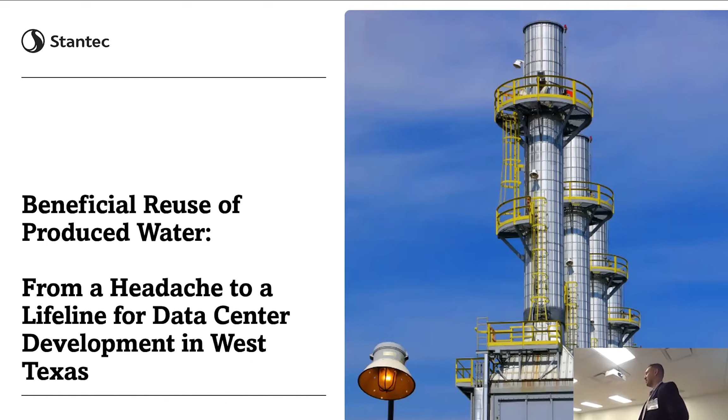I'm really excited to be talking to this group today because it brings together two industries: one that I've been very involved with over the past decade, the oil and gas industry, and a new industry entering the fold as a potential off-taker in data centers. Seeing these behemoth sectors come together and do development is really interesting, and trying to solve their problems, especially around water, is something I've been passionate about. Finally getting the opportunity to see potentially things happening.

So I work at Stantec. We always start with a safety moment, looking at risks and safety in the context of energy. If there's some energy source out there, there's probably some sort of risk. That's a good way to take an easy look at it—okay, there's something high up, there's potential energy, it can fall on me, something hot, that can cause bodily harm. I think this is a pretty interesting and useful tool, and wanted to share that with this group.

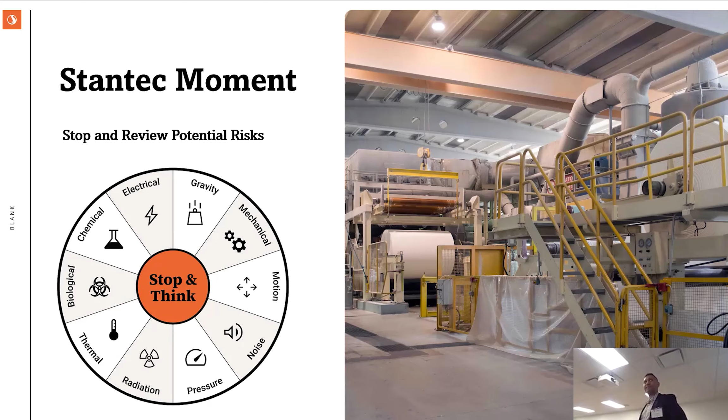In terms of the agenda, I think the last couple speakers really spoke a lot about the things I'm going to touch on briefly. They got into it in depth, which I'm really grateful for because I'm no cooling expert. But what I really want to talk to you about is the potential for really increasing our water supply. What we're talking about in a lot of these cases is where do we get it—groundwater, surface water, wastewater reuse. But really what we need to talk about is how do we get more water, and there aren't that many options. This is a case where water is a problem for one industry but could be a solution for another. I'm going to talk a bit about produced water—what it is, the challenges around it, what's typically done and what could be done. I'll also talk about data centers, not as in depth as Luis, just the water demands and some heuristics around water-heavy cooling portfolios—what you could look at for volumes, things like that. Some of the risks and barriers, and then conclude with some final thoughts. Hopefully I didn't put in too many slides, and we have some good Q&A afterwards.

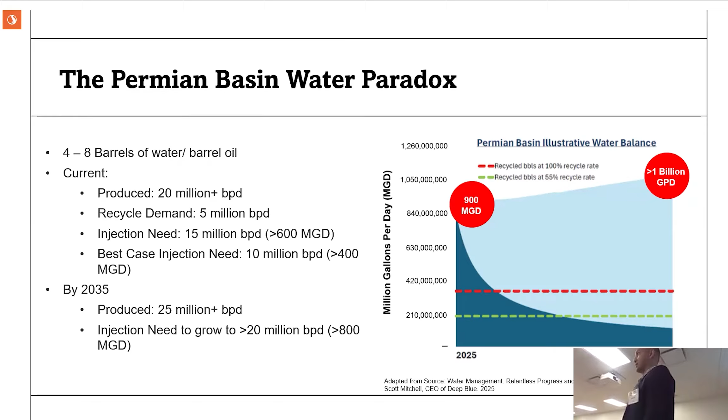For my oil and gas clients and people I talk to, they say they want to be producing the Permian for at least the next 30 years. So the water cut is just going to keep growing—this is just going to keep becoming a bigger problem. And of course, they're going to want more oil and gas out of that region. But the traditional way of water management is coming to a bit of a halt, simply because if you think of the subsurface as a big tank, that tank is running out of space.

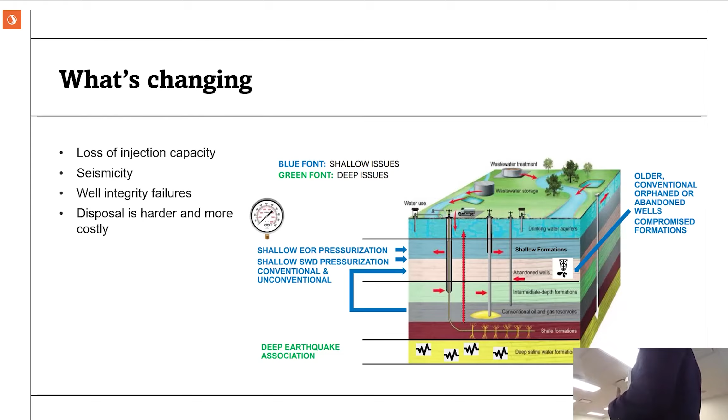We've seen this with deep well injection, which has been the traditional way of disposing of produced water, getting seismic events because of just the lack of pore space in the deep subsurface. They've transitioned over to shallow zones, and there's a lot of orphan wells that aren't plugged correctly, and we're seeing well blowouts because of the pressures within the shallow zone. So just in a nutshell, it's becoming harder. This is a problem that, what I've heard, between 2030 to 2032, we're going to be running into some serious problems. Just to make it clear, this is an existential problem for the oil industry in West Texas. Can't manage or produce water, you can't produce oil.

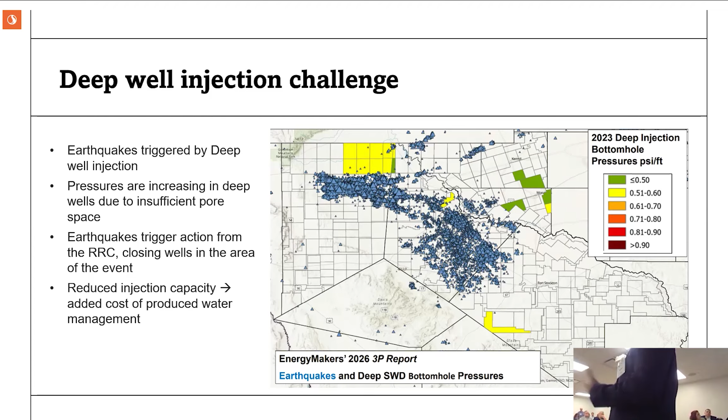So the deep well injection challenge, earthquakes are triggered. I've pulled some public information around the earthquakes, and you can see that in last year's presentation, I had two snapshots a decade apart from each other, but they're growing not only in frequency, but also in the scale of these earthquakes. Like I mentioned, it's just because of a lack of space. What happens is when an earthquake happens, the Railroad Commission creates a zone around which those wells need to be shut off for some amount of time until the pressures go down. That actually adds cost to the producers, because if you have less supply of injection capacity, your cost goes up.

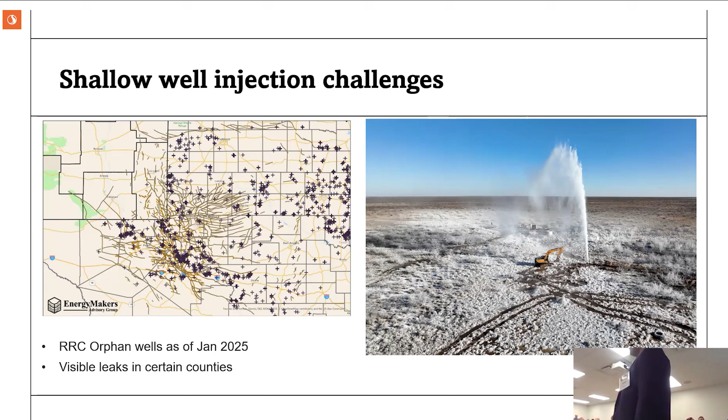So what are the options? What do you do? You can move the water away to some other places where injection has not been done, but this is very expensive. There's a new pipeline that's been announced that's going to cost nearly $450 million. And it's really not a long-term solution. It's kind of kicking the can down the road.

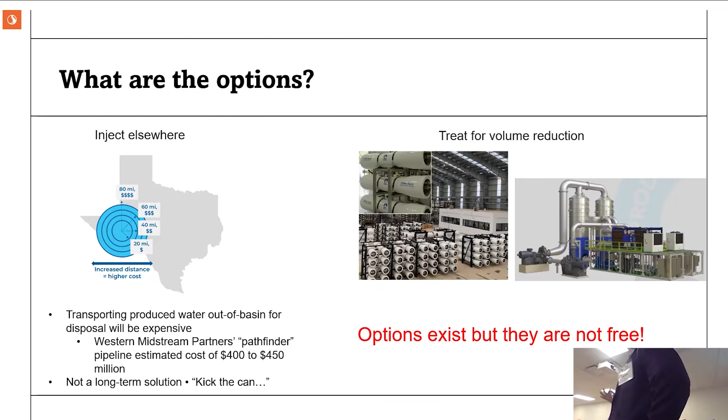These volumes are massive. You can also treat to reduce the volume, because you won't be able to eliminate it. You can reduce the volume, and that's been something that's been looked into, but it's been very costly. But as technology has advanced in this space, I think the costs are becoming somewhat reasonable. So there are options, but none of them are free. And really, that's what the oil industry needs to come to grips with. That's where we're at today.

In terms of produced water, there's no standard produced water spec. It's going to be different from the same well on a minute-by-minute basis, or even more regularly than that. It's going to differ between, say, a couple miles down the road - it will be very different.

In the worst case scenario, we've seen salinities up to 170,000 milligrams per liter of TDS, and that ranges all the way down to 100,000. So it's still very saline. The salinity of seawater is around 30,000, so that's 3 times that at the very minimum.

And it's complex. It's got all sorts of cats and dogs in it - oils, different scaling components, metals, radionuclides, you name it, it's in there. It's also got production chemicals, trace chemicals that are coming back from the production that was put in there to begin with. So all that to say, it's a very challenging water to treat, and being a chemical engineer, you can treat anything - it's about cost, right? So it's very costly.

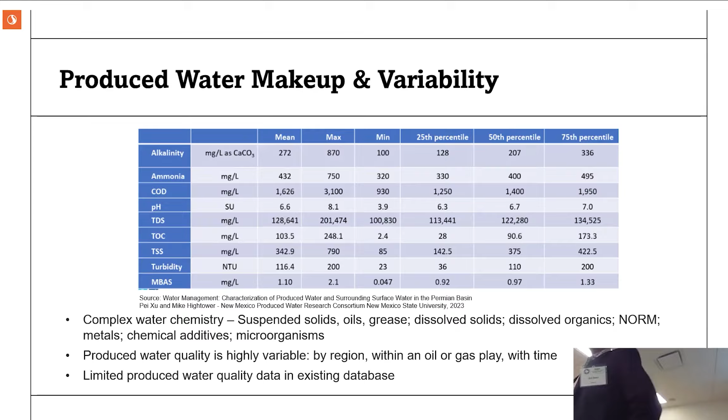I'm going to flip over now to the data center story. I think Luis covered a lot of this very well in his presentation, but really, what do data centers need in order to exist? They need a land mass, or a place to put the facility. They need power. They need fiber. They need a skilled workforce, and of course, they need water.

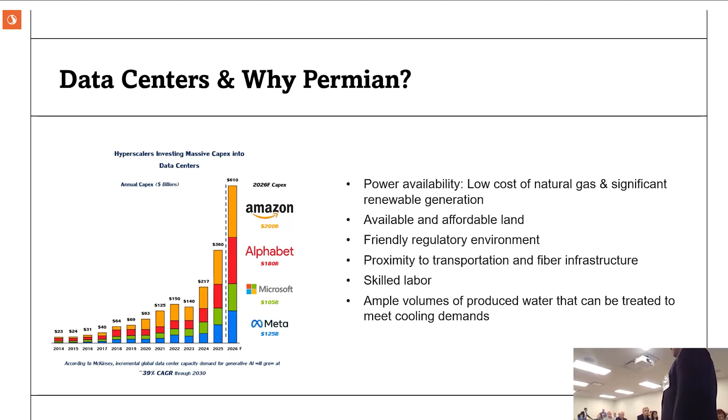The Permian Basin is unique in the sense that it's got lots of gas, and the ability to do behind-the-meter power is very appealing because of the queues to get into the grid. So it's got a lot of gas that you can use for behind-the-meter power. It's got a lot of land. There are major highways through there, so it's got fiber. It lacks water, in the sense of the sources that Luis listed, but it's got a lot of produced water. So trying to tie these two together is a really interesting thing.

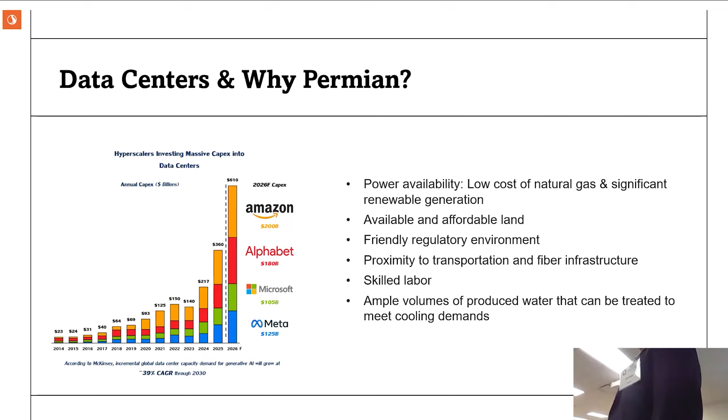I apologize, I noticed after I sent my last version to Gary that there was a little bit of an error here, so I'll just talk through this. High level, again, Luis covered it - you can have very heavy water-cooled systems, and you can have air-cooled systems, and many things in between. For the purposes of this set of slides, I'm going to focus more on the water-cooled systems because, like Luis's slide said, it's the most energy efficient. So if you can have a better... forget the term... energy efficiency ratio, power, PUE - if you can have a better PUE, that's ultimately the best. So if you have water, you use it.

But even with the hybrid systems, the ones that are not purely air or water, there's going to be some water demand. And sometimes in West Texas, even a minimal amount of water demand is not something you can fulfill from looking at your traditional sources.

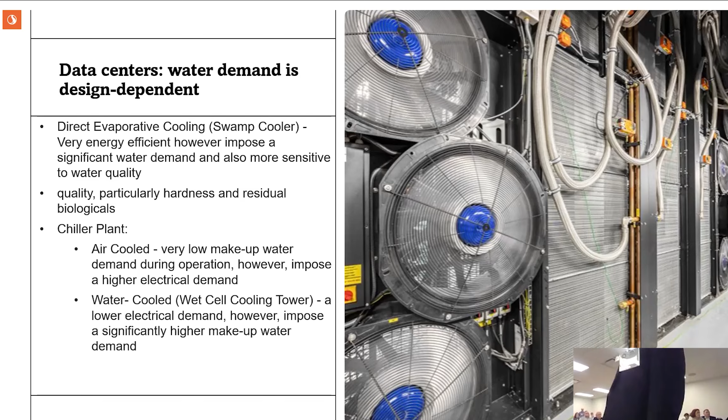In terms of the water quality specs, I wanted to paste in the produced water quality specs here, but I would have gotten too busy. I'm gonna ask you all to jog your memory about how bad it was. This is very clean. And the volumes, if you were to use an evaporative cooler or a swamp cooler, you could be looking at 10 million gallons per day per gigawatt, roughly, in West Texas.

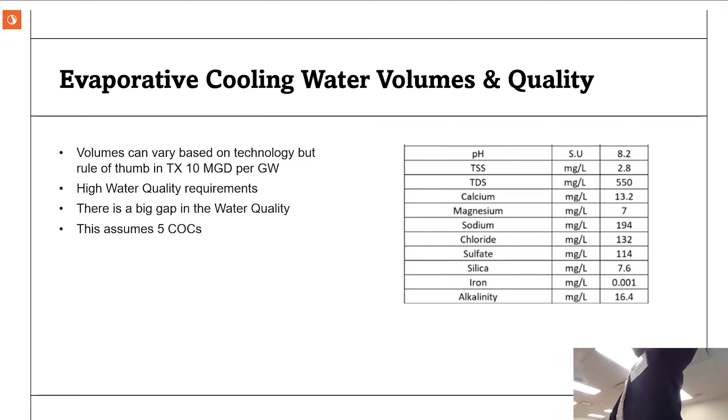Assuming 5 cycles of concentration, this is the water quality you'd want to get to. So from your 150,000 milligrams per liter TDS to 550. That's the gap, right?

So how do you treat produced water? You got to really go step by step to make sure you're getting out all the different things that could harm the desalination technologies down the line. Typically, produced water is co-located to a facility that would do some very coarse separations through what's called a gun barrel and some walnut shell filters, really to get your oils out. Now you've got mostly water, and you start getting some of the soluble oils out. Through the course of that, you may have some precipitation.

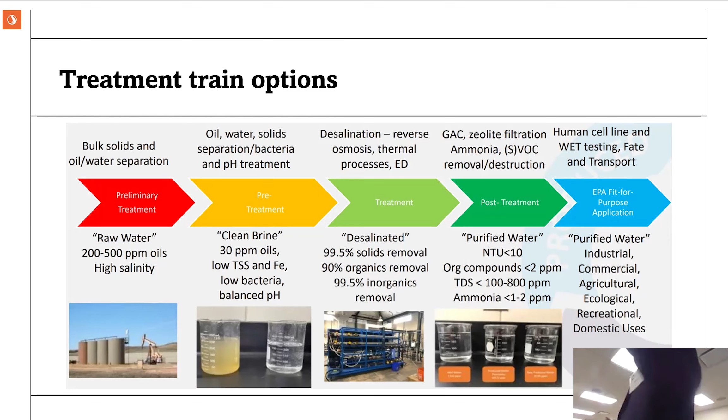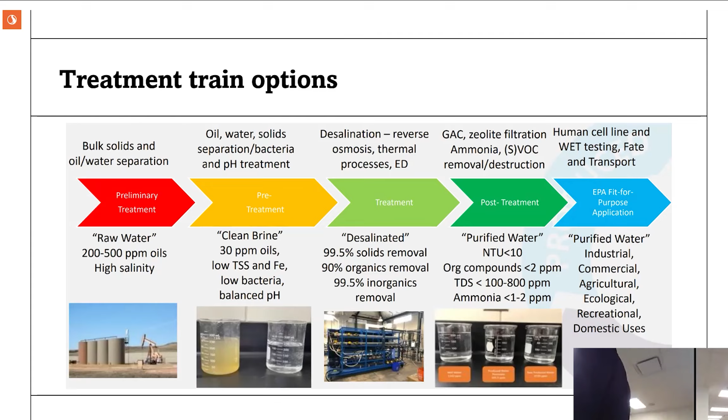Then you go through a pretty extensive pretreatment train. If you were going to do desalination, you would look at what the technology is, and we've done a lot of work more recently around membrane-based technologies that are kind of advancing. So if I was talking through a block flow diagram around membrane-based technologies, you do the pre-treatment required, you do the desalination, you do some post-treatment. In this case, it was looking more at surface water discharge types of things. So for industrial use, maybe not all of these apply.

This is that block flow diagram I was talking about. I think this is quite interesting because, like I said, the challenge around produced water treatment is really the cost, right? And I can put some rough numbers to this.

If you were looking at a thermal-based solution, you're looking around $3 per barrel fed into a system. Per barrel of water fed into a system. In comparison, an injection well costs about 70 cents. And that's a big gap because you have to consider you get 4 to 5 barrels of water per barrel of oil. So if you're going to mark up your barrel of oil based on your disposal costs, you're actually looking at $15 as opposed to 3, right? So trying to minimize that cost of treatment is really where a lot of focus is right now.

Membrane-based solutions offer some promise on paper, and more recently in the field as well. Some proof has been done, and they're kind of coming up on that TRL level. But it does require significant pretreatment.

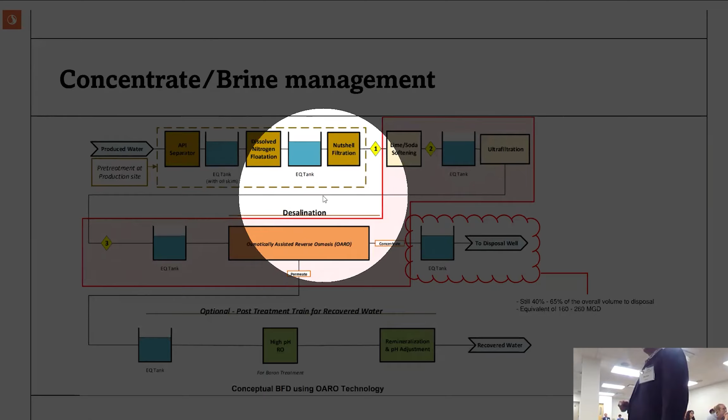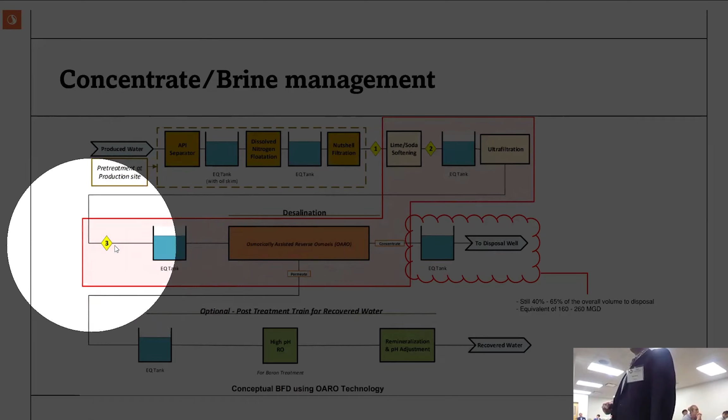So we talked about this stuff done in the produced water collection area, and then this would be the pretreatment potentially around membrane-based solutions. You may do some softening, you may not. You'd have ultrafiltration, you'd probably have some sort of final polishing for your dissolved organics prior to going into your reverse osmosis.

I think the technical term now is LSRO, low salt rejection reverse osmosis. The branding around OARO and this has been a little bit confusing. But nonetheless, then you go into your post-treatment trains.

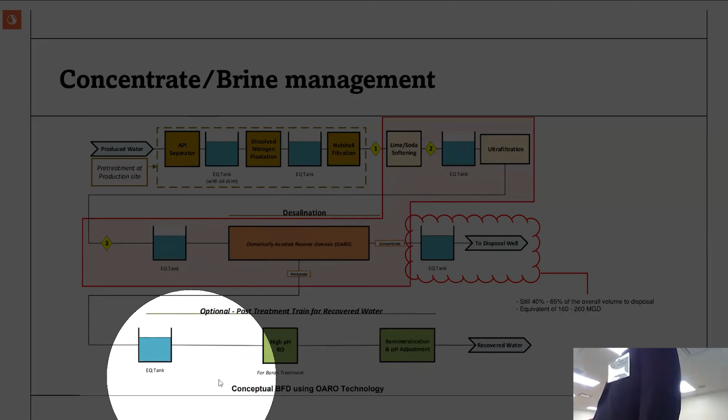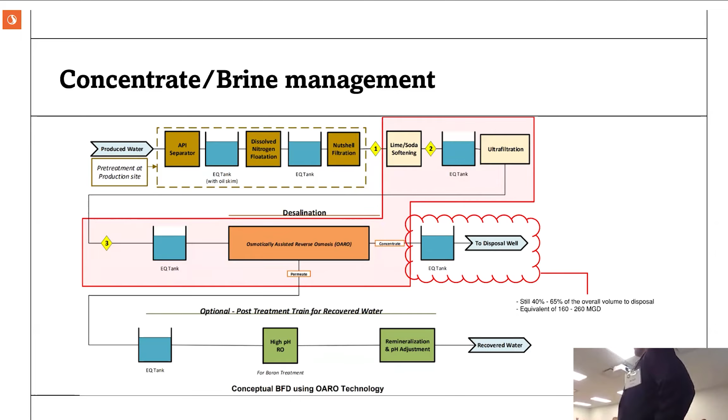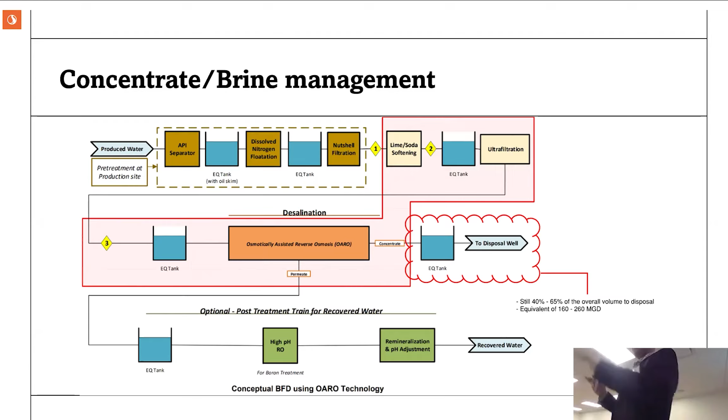Brine management still is an issue, right? And you still end up with 40 to 65% of what you sent in as brine. So that's something on the order of 160 to 260 million gallons a day still that would need to be injected. But it's a significant reduction in the volume. And my friends who are geologists say that would make a big difference. So that's kind of the holy grail that we're trying to get to right now.

As I mentioned earlier, the cost of treatment and the impacts on the economics, I think it's really important to think about this from the big picture. The price of oil really permeates throughout, right? When the prices of energy go up, groceries get more expensive. There's so many different things it touches that even a small amount matters. Earlier in my career, I used to think, what's the big deal about some small dollars on a barrel? But you gotta think about this in the big picture, and also in the context of the oil producer who's actually selling the oil and treating the water as a waste product.

So multiply out the number of barrels of water to what that is equivalent to in barrels of oil, and that's your actual cost of the waste management. This actually does not take into account the fact that you still need to inject that 60% or whatever. That's something I thought of later on after I put this together. But in essence, you're looking at somewhere between a 5 to 10% increase. I just took the price of gasoline now and tried to come up with this. But you can kind of see the inflationary impacts that would have on everyday life, right?

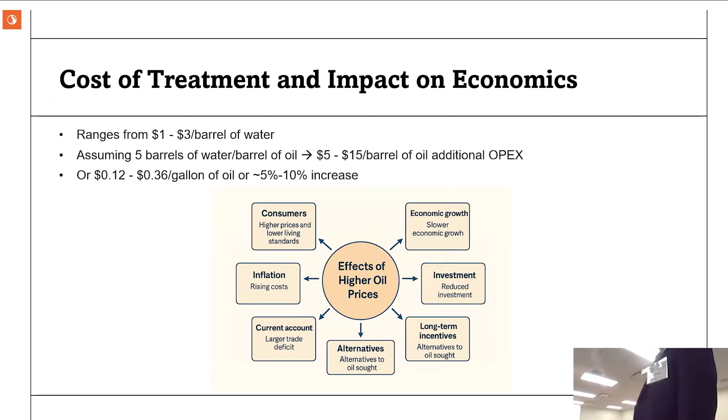There's a lot of risks. I think the main thing is that this needs to be done at scale pretty fast, and it hasn't been done yet. When you're talking about putting steel in the ground in the next 5 to 7 years, to do a new process at this scale, that's just something everyone's gonna have to come to terms with and figure out how to manage that risk.

The technical risks are that the treatment technologies, especially the ones at lower cost, and there are certain ones coming up that are promising but not quite there on the TRL scale. These aren't mature. It would be first of its kind at scale.

The water midstream infrastructure is not built out. Considering how much water is produced, it's not really transported and collected anywhere in order to treat at scale. It's transported enough to be able to inject in different locations. So that is a risk to the schedule that these producers are meeting, but it's an opportunity for many companies looking to participate in this new economic leg of the oil and gas industry.

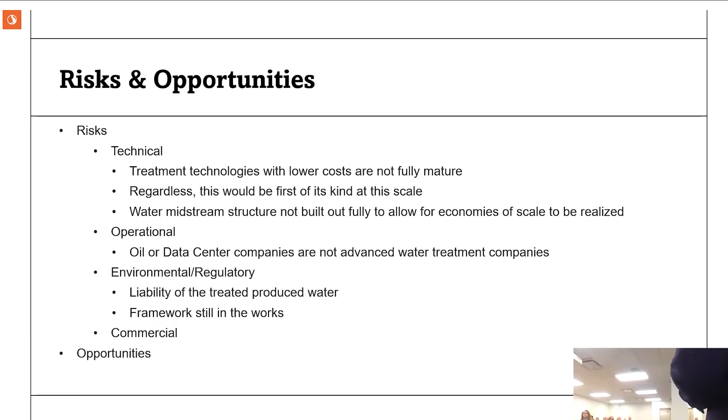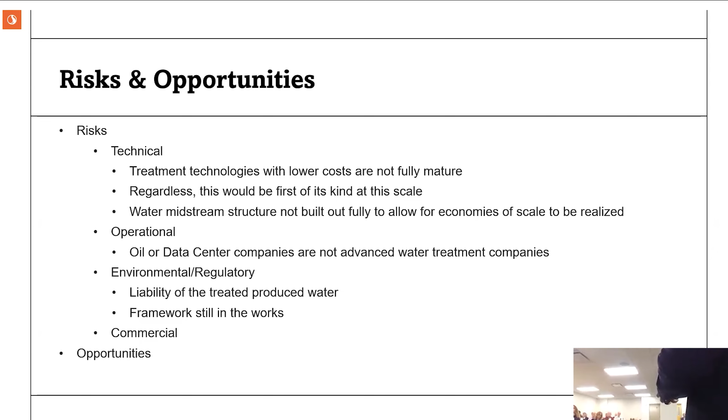I did fail to mention, this is a bit of a unique space for chemical engineers working in water. I've been working in the space for 20 years now, and as we go more into industrial reuse, which Luis brought up, it's really a place where chemical engineers fit well, knowing the types of chemical contaminants generated through industry and the ways to process that.

So with that, conclusions. Regardless of how produced water management changes, the change is inevitable and it's imperative. Treatment for volume reduction is a viable option based on our analysis. Like I mentioned earlier, water supply is not unlimited. Looking at ways to increase your water supply through seawater desalination or produced water reuse, those are things that can actually change the game, as opposed to robbing Peter to pay Paul.

Technology exists, but the cost is the main barrier. Regulatory framework for discharge and use for beneficial crops is still a challenge. I think that's another area they're looking at, beneficial reuse being a pretty low hanging fruit.

Data center offtake offers a win-win. Produced water is a problem. Data centers need water. I think the cost challenge can really be addressed there with some cost sharing, if the data center clients are comfortable paying more for their water while being in the Permian Basin. So that's definitely a win-win on that one big issue.

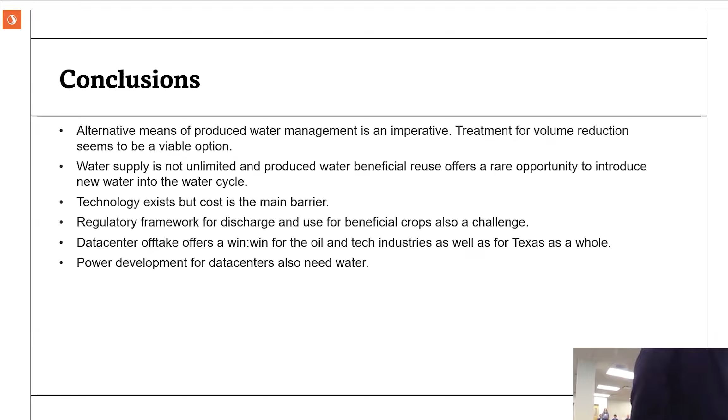Just to highlight, with air-cooled options, the power demand goes up, and the water demand goes up. The water demand doesn't go up as much as it would if you were just going with evaporative coolers on a data center, but there's still water demand from your power. So just something to think about, thinking about it from a whole system perspective. And that is the end of my presentation.